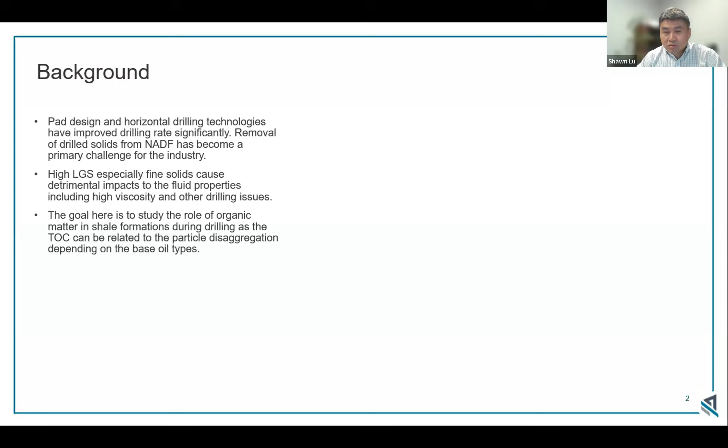So one thing we want to start with is looking at the drilling fluid properties. And one thing we know is everybody, when you start drilling, is fighting against the drill solids. The reason is because when you have solids in your mud, the fluid properties go out of range, especially viscosity. One reason is the particle size.

When we're drilling, we're cutting into the fluids, and some of the fines stay in the fluids, as shown here. This is an example of a 14-pound non-aqueous drilling fluid. If you look at the particle size distribution, the D50 is 7 microns.

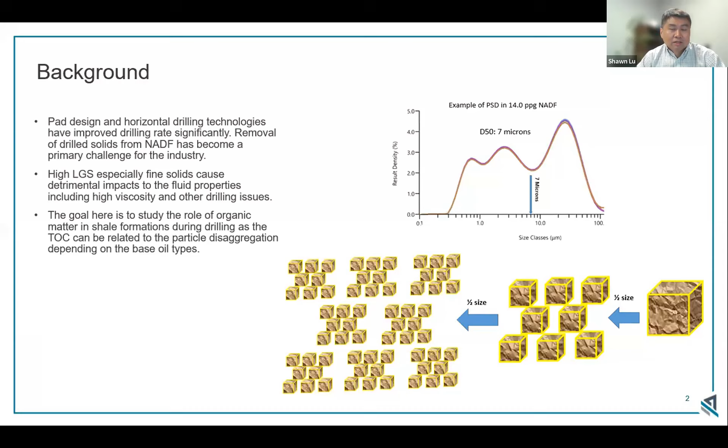So why is that an issue? Well, this is middle school physics. If you look at particle size and surface area, when you go smaller in size, your surface area goes up exponentially. When you have more surface area, it consumes more chemicals and creates more chemical interaction with the emulsion and with particles. That's the reason we have the issue.

There are many angles to look at it, because one of the challenges not only in drilling fluids but in pretty much all our operations is we have too many moving parts. It's very hard to get apple-to-apple comparisons. When you change too many parameters at the same time, it's hard to get a clear picture.

So we feel blessed to be able to get some standard material and standard procedure, but with a non-standard test. We'll go through the test procedure and matrix we used in this study. By the way, we published this study at an AADE conference earlier this year held in Midland, West Texas. So if some of you want to take notes, that paper is publicly available—you can look at the AADE website to find it. It has most of the details we're presenting here.

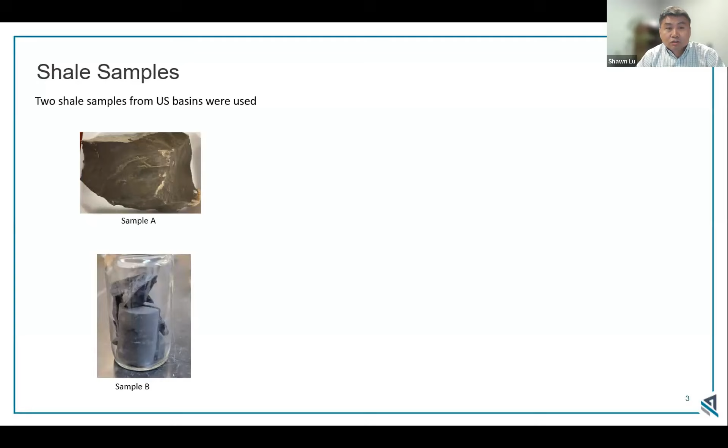So coming back to the test procedure, again we did more than what we're showing here. We feel we just selected a part of the data to support our conclusion. So we selected two samples, basically two core samples or shale samples, and we ground them into fine versus larger particles, basically 5 to 10 mesh.

What we're trying to simulate is the fines that will stay in the fluids—in other words, your solid control equipment cannot take them out unless you do something special like a high velocity centrifuge. The other one is the cuttings you would recover from your shale shaker. The question is how much fines versus larger particles you will get.

Before we go into that, like Frank mentioned earlier, we do a lot of study on mineralogy to look at how much clay and what the overall rock properties are. But at the same time, I think we should look more at the organic material, organic matter. One way to measure that is the TOC.

So those two, sample A and sample B—sample A actually has very high organic content, like 17.9%. Sample B is 8.7%. Certainly you may argue whether this is representative or not, so we looked at some of the data. 17.9 is definitely on the high side, but in a lot of US basins we see averages maybe around 4 to 5, and some as high as 8.

Sample B is the core sample we got hold of. Certainly it varies from formation to formation, from depth to depth, but we think with those two samples it would be a good study for us to look at.

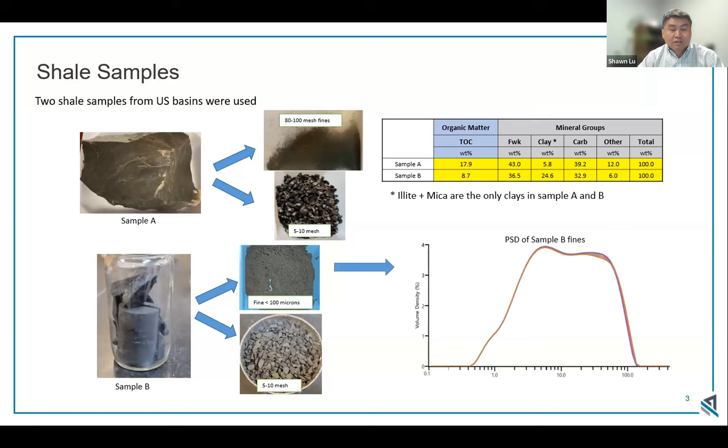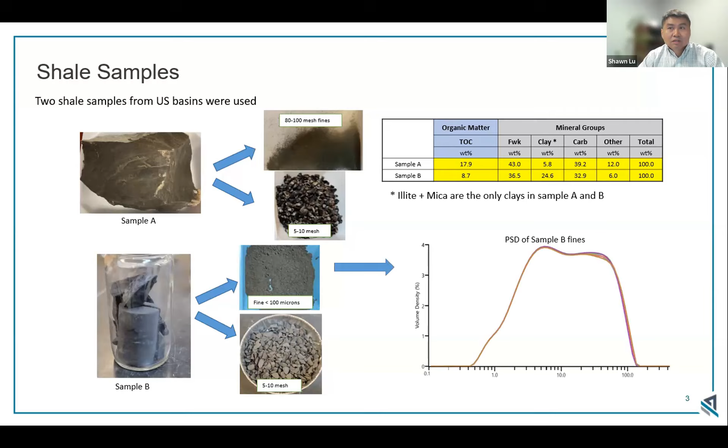So before we go further, this is the particle size distribution of the fines—this is the background, basically before we add the dry particle to the fluid, so we know where we started. We use this for comparison to see how much the particle size actually changed.

So this is the test matrix. If you're familiar with API 13B2, which is the non-aqueous drilling fluid test procedure, a lot of standard tests basically do a mud check—fluid properties, rheology, high temp. Certainly we're following that, but what's new here is what we call the accretion test or shale recovery test. This is very similar to the rolling test we do for fracking, but this is for non-aqueous fluids.

Coming to the point, normally we don't think non-aqueous fluids cause any shale issue, and in most cases they don't. But when we look at drilling, when there's more movement, more dynamic force involved, the property of the non-aqueous fluid matters. So what we look at is whether the continuous phase, basically the base oil you use, makes a difference.

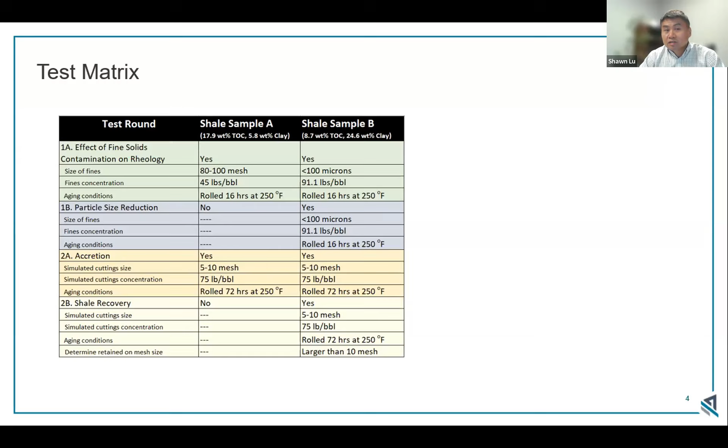Again, this is the test procedure we look at. We add the fines to look at how the fluid property changes. So this is basically the key of the test, right?

We actually have a 1x4 steel bar when we do the rolling test, so basically we are simulating the drilling process. We put it in the aging cell with the solid, with the 5-10 mesh solid, and with the fluid we made. We put it in the oven and roll them at a temperature. So basically we are not only hot rolling the fluid, we are creating interaction between the steel bar and the fluids.

Again, the purpose is simulating the drilling process. When you have a drill pipe rotating in a hole under temperature, you see what happens to your drill cuttings, right? Because depending how deep you are, it may take 1 or 2 hours for the cuttings to move from the bottom to the surface before it gets screened out or taken out by the shale shaker.

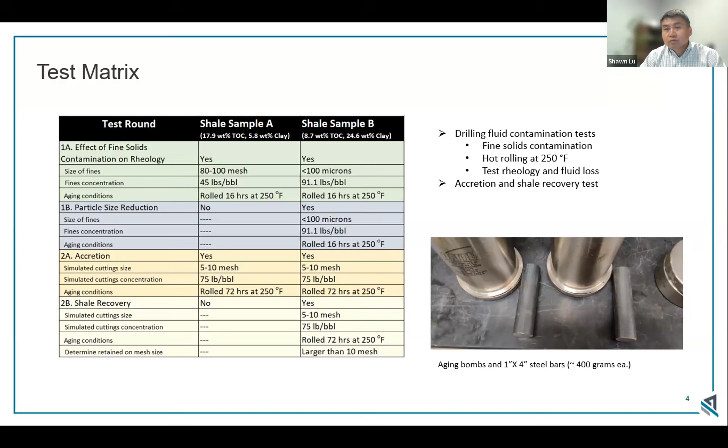So again, in terms of fluid properties, we are all following the standard API test, but the accretion and shale recovery is what we think is new here. So again, like I mentioned at the beginning, there are too many factors, and a lot of times when we make a mud, it's like cooking in the kitchen, right? So you have to follow some of the standards.

So what we did is we certainly started with the standard formulation. All the additives and the formulation we maintain almost identical. What we are varying here is the base oil, as I mentioned a moment earlier. Certainly the oil-based mud is diesel-based, and the synthetic is the GTL, it's a new flow based. We're using the identical formulation and look at the difference.

So the question is why the GTL, why new flow? What we think is, the environmental aspect, I don't think we need to even discuss. The synthetic or the GTL is pure synthetic and much more environmentally friendly. If you're a mud engineer, you know how it feels standing on top of an oil-based mud pit. I have personally stood on that, and also on the mud pit made of GTL, and you will notice the difference.

But in addition to the environmental HSE aspect, from the chemical point of view, if you look at diesel, there's a lot of BTEX aromatics, and diesel always has higher solvency than GTL. GTL is basically a pure paraffin.

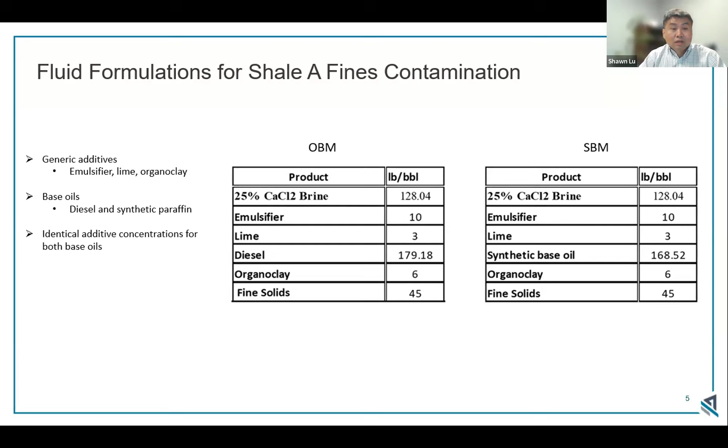We don't have some of the data with us here, but one example would be elastomer compatibility. So that's another angle. But again, here we are looking at how the base oil interacts with the material, with the formation material, to see how they impact the fluid properties. So this is the first set - this is basically where we add the formation solid, and we look at before and after.

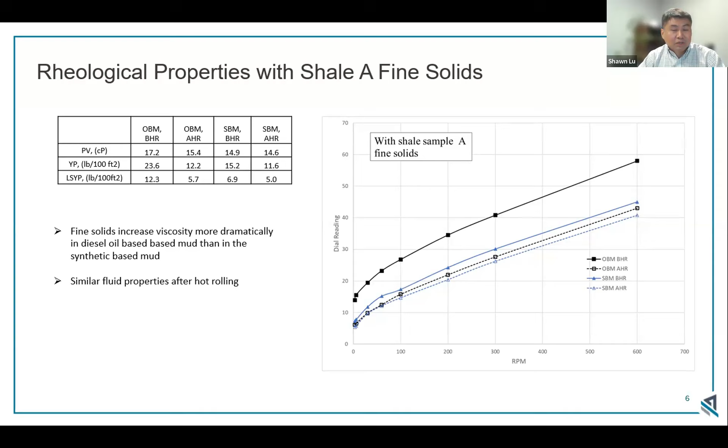So the key message here, for some of you not familiar with rheology properties, we only look at the PV and the YP and the LSYP - basically this is the FAN 35 standard rheology test, which looks at the difference between oil-based and synthetic-based. When we look at the properties, it gives you some indication of how the fluid property will change. Again, viscosity is our enemy nowadays when we're drilling in the US basins, because we have too much solid coming into the fluid.

And then this is the HTHP test, with what we call the Shale A fines. As a reminder, this is the one that has 17.9% organic material. And if you look at the filtration volume in terms of the filtrate, they are very, very similar here. One thing I want to point out is the color.

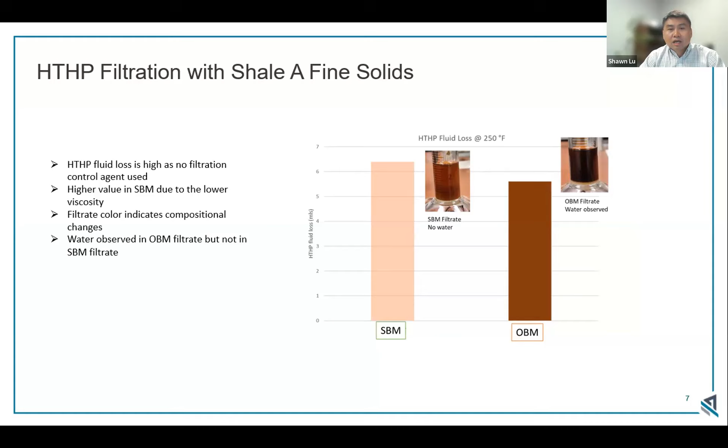And that's an indication of the solvency of the oil-based mud versus synthetic-based mud. So one of the reasons we did the filtration is we want to study how you would form a filter cake during drilling. I think this is a very interesting slide with some data. This relates a lot to drilling operations where you are tripping or running casing - you know, sometimes you have more torque or more friction. Even in oil-based mud, normally people think lubricity is not an issue, so this may be an indication. So again, this is after HTHP filtration - we got a filter cake.

We simply roll a steel bar on the filter cake to measure what we call the stickiness, and you can visually see the difference. We also measure how much is stuck on the steel bar, and that's a huge difference.

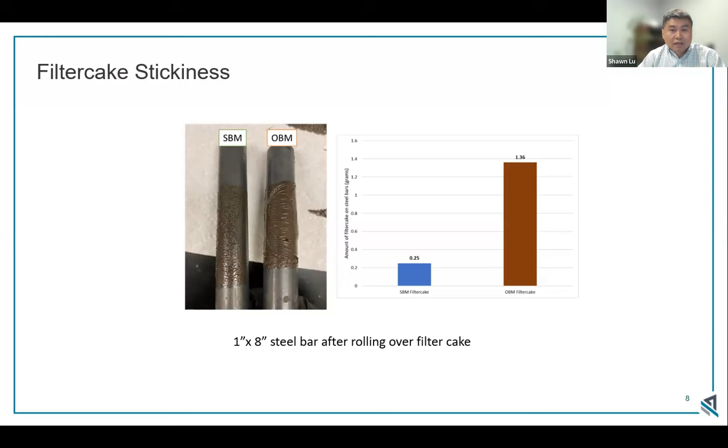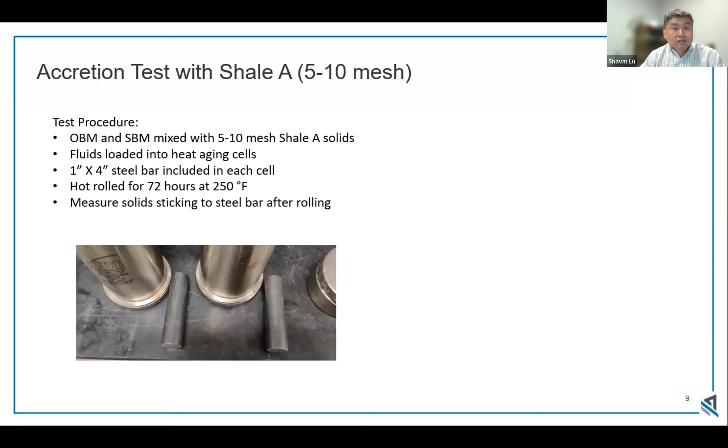This is on the filter cake, right? So now comes what I think is the most exciting part: the accretion test. This was shale A. We put, again, a 5-10 mesh solid and load them into the fluid, which we made in the lab as a standard formulation, and we hot roll at 250 for basically 3 days.

This is one of the results. We're looking at the picture on the top right. This is after we recover the steel bar in the rolling cell, and look at how much solid stuck on the surface. When we did a comparison, there's almost double the amount of solid stuck on the steel bar. That's what we see with shale A.

One question would be, okay, this is with one, what happens with others? So we actually did more than just A and B. We have C and D as well, but for time constraint we're not showing that data.

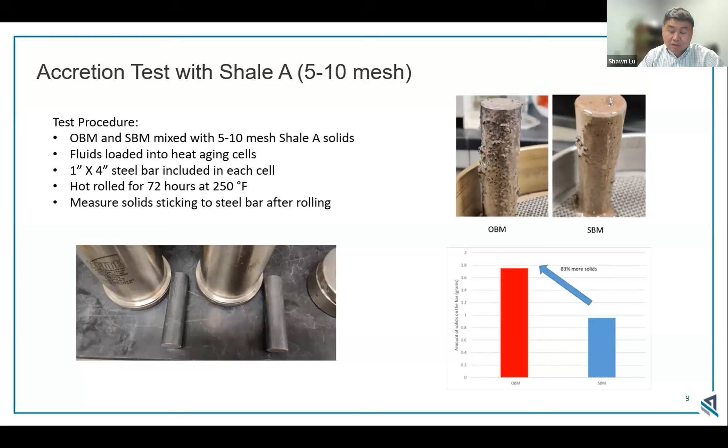If you look here, all the black lines, solid and dotted, are the oil-based mud. The blue lines are the synthetic-based mud. This is basically showing the same conclusion as we did with shale A, but the difference is that the synthetic mud has much more tolerance to solid when you add fines.

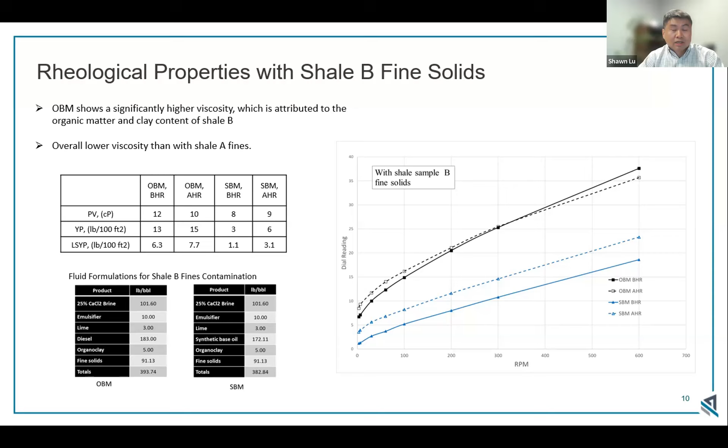So again, as a reminder, this is two separate tests. When we do the fluid property test, we're adding the fines, assuming that fine solid is left in your fluid. For the accretion test, we're using the 5-10 mesh solid. So this is another angle to look at.

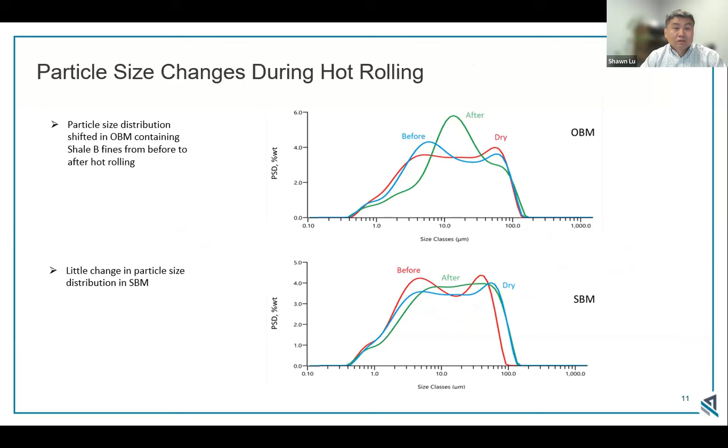As you know, during HTHP filtration you collect filtrate. I can show you in the previous picture the color difference between the filtrate from the synthetic versus diesel. We also ran a chemical GC, looking at the chemical composition of the filtrate to see if there's any change.

We're not showing the spectrum here, but here are the key takeaways from that study. We see the amount of volatile material, or more specifically, any peaks on a molecule less than about 10 carbons, a 10-carbon chain. We compare to the virgin fluids, the diesel and the GTL, and see how much it changed. That's an indication of how much the smaller molecules actually got stuck with the cuttings or the solid.

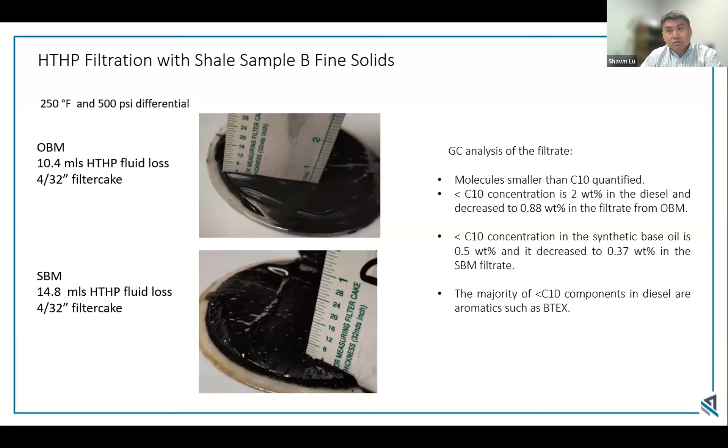So coming back to the shale recovery test, this is what we did with shale B. Not only did we look at how much stuck on the surface, we also looked at how much we can recover. This is the result, following a very similar test to what we did with shale A.

We add the 5 to 10 mesh solid, and we add a certain amount. After 3 days rolling with the steel bar, we see how much we can recover. The picture shows how much we recovered on the 10 mesh screen, using the 5 to 10 mesh solid.

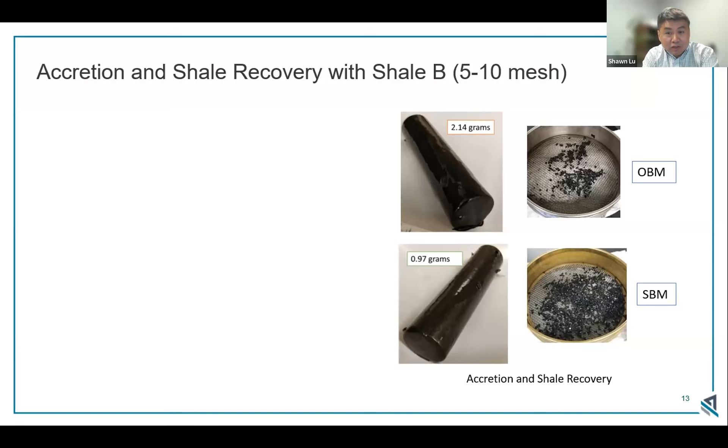You see how much recovered, in diesel versus synthetic based mud, right? 98% versus 24%. I think that is huge. That explains a lot of things going on in the field. For example, you would have to have more dilution with diesel because you have more solid, and the solid removal efficiency, also how dry is your cutting, the mud on cutting ratio. I think this all has impact, right?

So for comparison, we did a water-based mud as well, because people always think oil-based mud should be very inhibitive, shouldn't be any problem. When we repeated the test with the water-based, we essentially recovered almost nothing, 3.5%, which is almost nothing. But oil-based mud is only at 24.2%. As a reminder, for this solid, we have 8.7% of organic material, but we do have almost 25% of clay. So certainly, depending on the amount of clay and depending on the amount of organic material, that's showing the impact on the drilling performance.

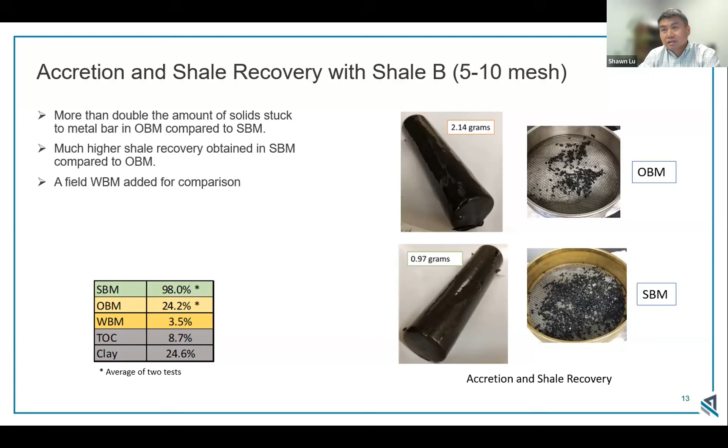So again, talking about what is the implication, we can easily connect this to the drilling operation. I don't know if I did a good job drawing a shale shaker on the bottom, but that's just an illustration to see what happens when we have a solid or cutting coming from downhole. When it becomes smaller solid, it's going to stay in the fluids, like I mentioned, the API, the barite, 74 micron.

What mesh screen are you going to use? You're going to use 100 mesh, or 150, or 200. That also causes other problems, right? So certainly we want the cutting to be as large as possible, that way we can recover them.

Also, you may have other issues I've seen many times. When you have fine solids, your fluid properties go out of range, and you have to keep fighting to keep the viscosity in line. A lot of times dilution is the solution, but you will end up with more volume of mud and more material to treat the fluid.

So again, if we take this to the overall upstream or drilling completion picture, I think this just gives an idea how this material interacts. Certainly, the other aspect is the force, right? If you're just pumping, we won't have that much force, but when you're drilling, there is a mechanical aspect as well. That's the reason with this accretion test we have the steel bar, to simulate the drill pipe.

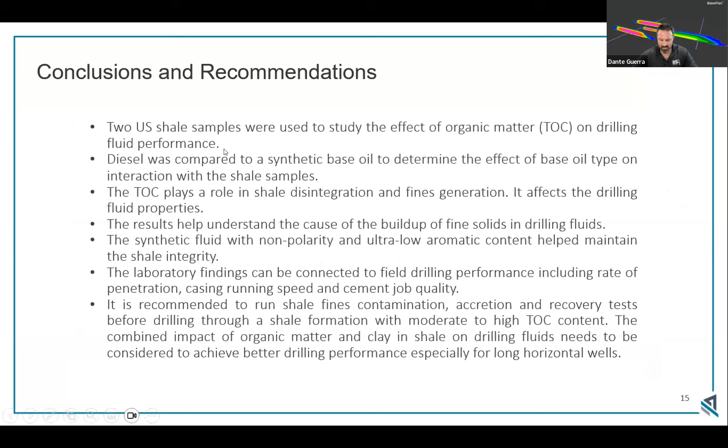Very good. Now, you did show some results with the accretion test specifically that showed more solids were being dissolved into the oil-based mud versus the synthetic-based mud. And you also showed a slide where you're measuring the viscosity, I believe, and the density.

So this dissolution of these smaller particles into the mud is causing an increase in both density and viscosity, I would assume? So the density, because you have your solid there - density is normally controlled, and it's certainly a critical factor when drilling. To answer your question, it increases viscosity, but as long as you have the same amount of solid in your fluid, your density doesn't really change. For example, if you're drilling with a heavy 14-pound mud, most of your density comes from the barite you add. Your low-gravity solid doesn't change your density that much - it's almost a secondary factor. That makes perfect sense.

That leads me to the question about cuttings transport - I think there are different schools of thought when it comes to drilling. Some people like to drill a very clean hole, some believe you should drill as dirty a hole as possible. But with the difference in viscosity and cuttings transport characteristics, is this recommendation of using synthetic-based mud the same across any type of unconventional application, or is it limited to certain specialized applications?

The short answer is we should push for this anywhere we're using diesel - it's not really selective to any formation. What we're trying to say is when you have higher organic material you may have more issues, and also when you have higher clay content. We know when we're drilling, sometimes we just have issues in a certain formation, and once you drill through that layer, everything seems to be fine. That's a very good point - so we see more application in the DJ and Haynesville, like I mentioned.

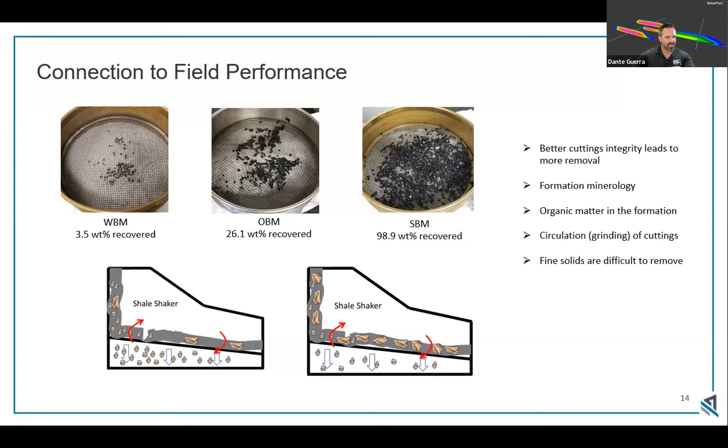So what about one last one? I know I said last question was last, but I just thought of something since you mentioned the biggest expense is rolling out a new fluid system. Can we use all the existing fluid handling systems, or is there special equipment required for the synthetic-based mud? No, the beauty about it is you don't need anything different. Everything is already there. All you need is just the hydrocarbon exchange, a paraffin-based system versus a diesel-based system.

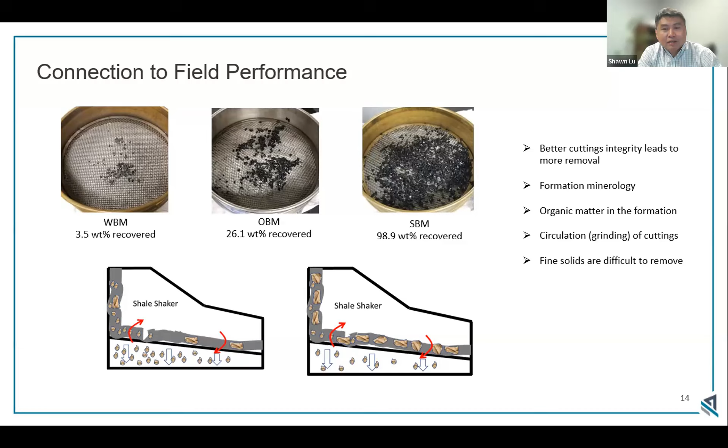Perfect. All right, and to add to Frank's comment on the cost, depending on who you're talking to, right? When you talk to a supply chain guy, even 5 cents is a lot. When you talk to an engineer, they may have the overall picture. So we've actually done some analysis along with the shale operator to look at the overall benefit versus the cost. Certainly, even just saving one trip to fix your mud motor, that saving alone is way more than the initial start.

As Frank mentioned, the initial start cost is due to the business model in the industry. If you already have diesel mud, now you have to pay a big chunk upfront. The way we've been working is closely with customers to look at the overall benefit and cost. If you save a day on rig time, nothing else matters. We're the poor chemical guys, and chemical cost is really only a small part. If you look at the drilling operation, chemical cost is still only 10% of our overall cost. If you can reduce the overall cost by 10%, then 10% of 10% really doesn't matter.

That makes sense? Yeah, it makes sense. And I see Ali Danishi wants to bring up a question.

Go ahead, Ali. Frank, I just want to let you know your comments and discussion added a lot of value to the whole presentation, and thank you very much. Your insight was very useful for somebody like me who was listening and trying to learn. Excellent job, Frank, as always. Thank you, Ali, appreciate it.